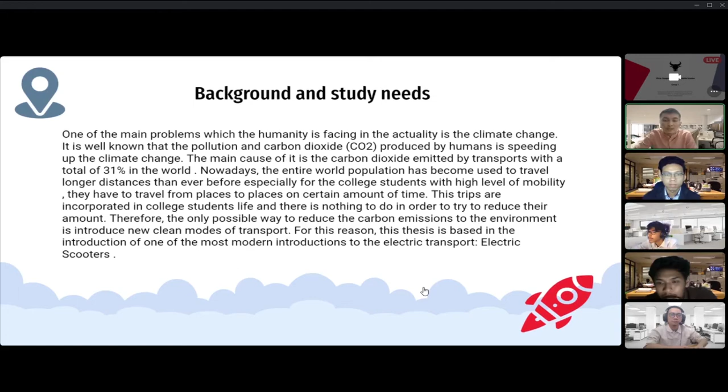In our problem statement, the first one is the electric scooter was chosen in this engineering design project. The initial problem for designing this project is to design a product that is not similar to the current market.

The second one, design a solution to tackle the existing pollution problem with a lithium-ion powered scooter. The third one, existing vehicles have so many problems towards the environment. The fourth one, replacing them with more efficient and durable electric vehicles could be a possible alternative.

The last one, this will be achieved by designing a compact, portable, easy to use scooter. So in our design brief...

We believe that a compact foldable electric scooter which is user-friendly for university students commuting to class within safety standards. The scooter should be lightweight so it can be carried up the stairs when folded. At the same time, it could carry heavy weight within the weight limitation.

The folding mechanism of the scooter should be easy so it can be parked or stored anywhere fairly easily. It has a long-lasting battery so the electric scooter can be used conveniently, lessening the required number of charging sessions, so it can be used for long sessions of commuting.

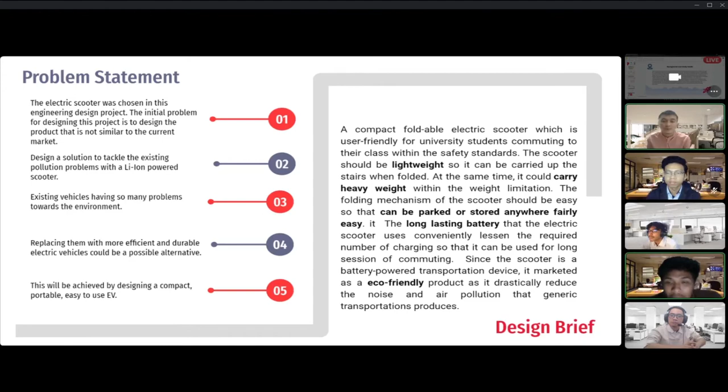Okay, thank you Abifadan for the explanation. Now we're going to proceed to product design specification.

In this part, I'm going to show you the safety procedure of our project, because safety is our number one priority. First of all, we have to wear a safety-approved helmet that fits properly.

A properly fitted helmet should touch all the way around your head. You should wear elbow and knee pads to save yourself from cuts, bumps, and bruises in case of a fall. Also, you have to scoot only in daylight for best visibility and avoid scooting in the rain.

You should also stay on the sidewalk when riding, to avoid wet or broken sidewalks. And you always have to stop at street corners, looking both ways, and walk your scooter across the street. To stop quickly, step off your scooter while still holding the handlebar.

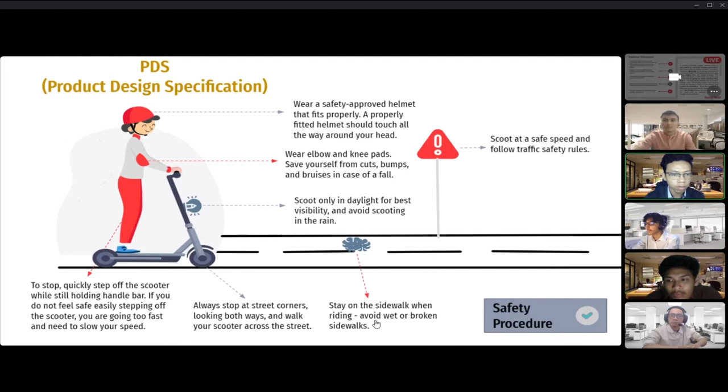If you don't feel safe easily stepping off the scooter, you are going too fast and need to slow your speed.

Now we're going to move on to the materials. The body parts are made of aluminum alloy, plastic, and rubber to provide safety while riding.

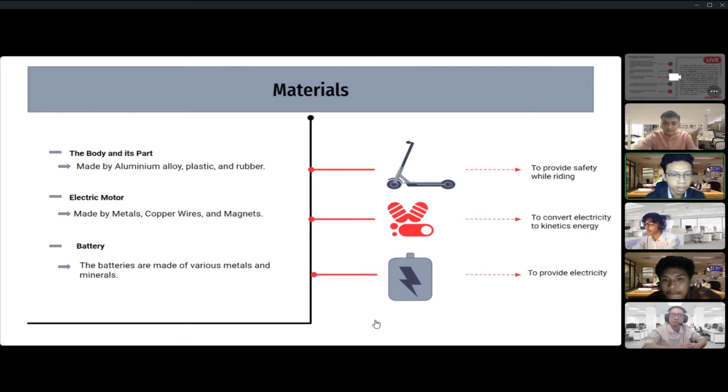The electric motor is made of metal copper wires and magnets to convert electricity to kinetic energy. And last, the battery. The batteries are made of various metals and minerals to provide electricity.

As for the ergonomics, the suspension has good quality to guarantee comfort, adjustable handle that can be folded, soft grip bar, and high quality grip tape for foothold.

For the performance, this ultra-compact electric foldable scooter is famous for thrilling performance, safety features, and affordable price for college students. The result? An incredibly well-rounded, easy to live with, everyday, fast, and durable scooter.

The following are the performance details of the scooter: the horsepower is 450 watts, the maximum speed is 25 km per hour, and the maximum mileage is 15 to 25 km.

For the power, voltage battery is 24 volts and 6.6 amp hours. For charging, it is 100 to 240 volts, 50 to 60 hertz, and the rated power is 250 watts.

For the agility of the scooter, the maximum climbing angle is 15 to 20 degrees, and this device can also be operated using a foot pedal.

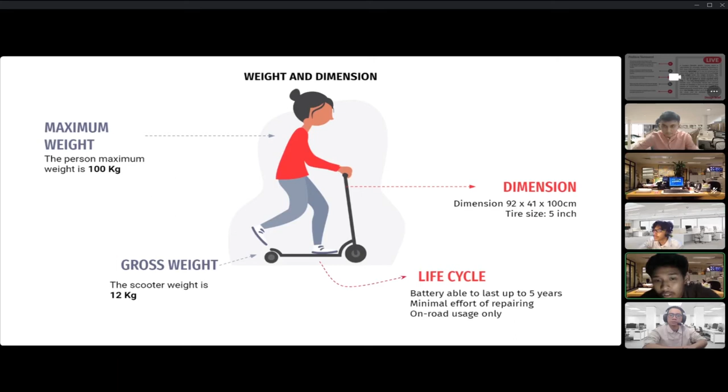Next, of course, the ecology — we support go green.

Next, for aesthetic, we have an underglow scooter LED RGB, and the headlight is LED. For the paint, we only have two models: carbon black and silver dove.

Next, minimal maintenance — the scooter cover is for indoor or outdoor use, UV and water resistant, and also dust proof.

Okay, thank you, Raihan. And now I'm going to explain the design function decomposition analysis. It is divided into three components, and the first one is the electric component.

It includes the speed controller, which controls the speed. The power switch turns on and off the scooter. The motor revolves the wheel, providing acceleration. The swappable battery supplies power to the scooter. And the headlight and brake light provide visibility for the rider and other people.

The second component is the handling component. It includes the hand grip, which gives a better grip for the handlebar. The brake lever activates the braking system. The handlebar controls the direction of the scooter. The wheels move and give traction to the scooter. Lastly, the brake caliper slows down the scooter.

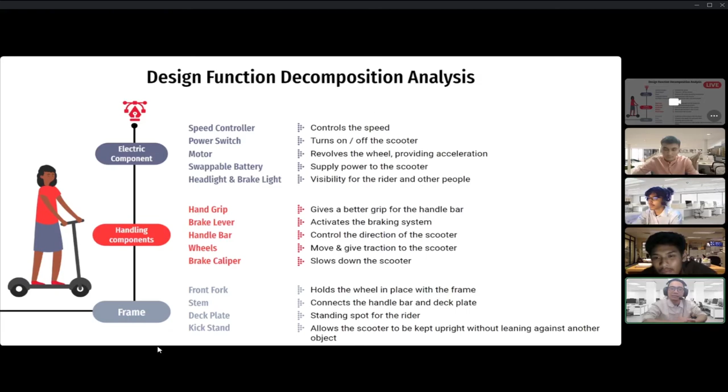Next, morphological function and solution. As shown here, we have 5 solutions and the materials. For the frame material, we have 5 options: carbon fiber, aluminum alloy, stainless steel, and mahogany. For the tire type, we have slick, off-road, solid, all-season tire, and honeycomb. For the battery position, we have 5 options: outside stem, on the foothold, inside stem, in the foothold, and in the handlebar.

For the headlight, we choose LED as the type of lamp, and we have 4 options for positions: near front tire, LED at the handlebar, upper neck LED, and LED on the stem. For the handle grip, we have 5 options: rubber hand grip, leather hand grip, foam, rubber grip with spike, and carbon grip. For foldability, we have 4 options: vertical foldability, simple foldability, complex foldability, and triangle foldability.

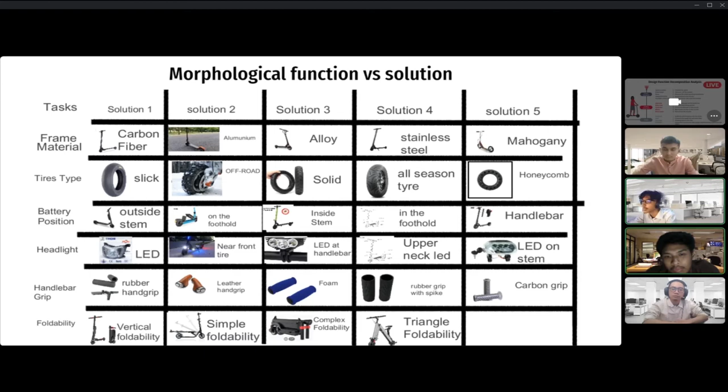Here I will explain about our screening matrix. We have 15 concepts, and we have several criteria as our points for screening our concept. From this screening, we have the best 3 options from our design. Next.

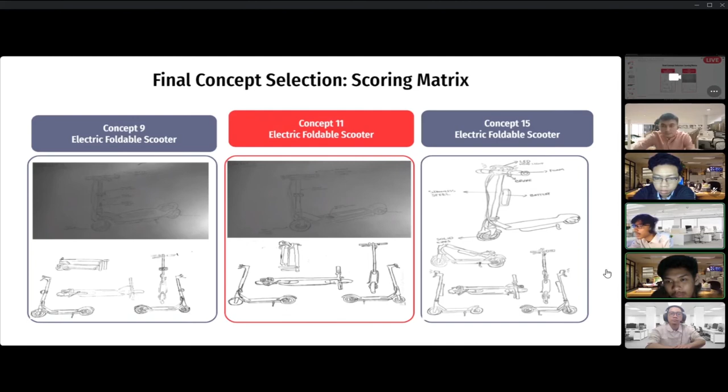As the picture shows below, here are the best 3 of our concepts. From the best 3 of our concepts, we suggest to create a new concept that we consider as the better design than what we have.

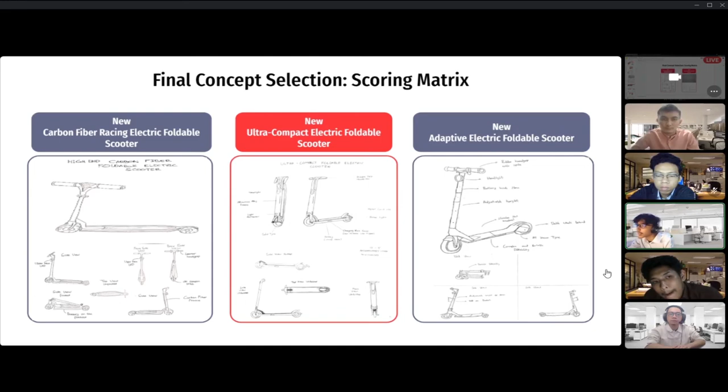And they are: carbon fiber racing electric foldable scooter, ultra compact electric foldable scooter, adaptive electric foldable scooter, multitasking electric foldable scooter, and casual electric foldable scooter.

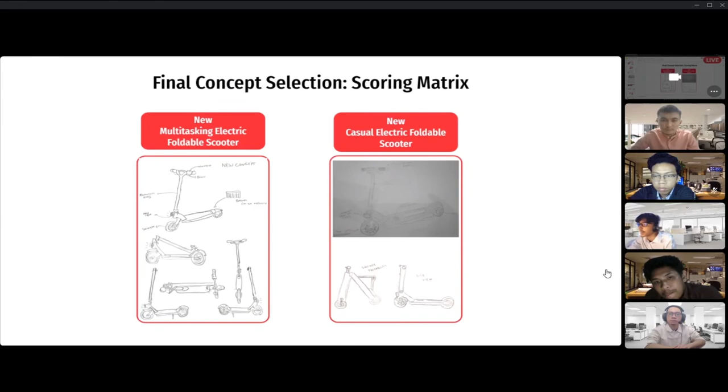Now I'm going to explain our final design and what's new in our design. Here is the in-depth analysis of our final design, which is the ultra compact electric foldable scooter.

It includes a headlight, an aluminum alloy body frame, a reflector at the bottom, and we chose a solid wheel as our tire type. For the handlebar, we opted for a rubber grip handlebar, and we added a speedometer. We also added a manual rear fender, which we can step on in case of emergency braking, and a brake light for safety. Lastly, we added a kickstand so the scooter can stay upright without leaning against another object.

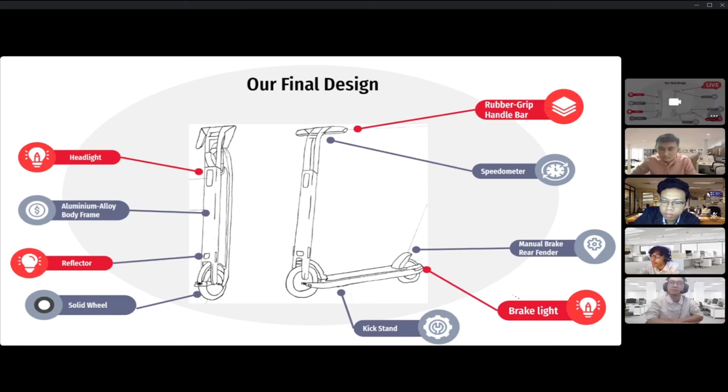So what's new in our final design? As mentioned, we added a speedometer with a built-in ambient sensor that can change the speedometer light at night. For the throttle system, we use a throttle controlled by pressing with the thumb, with two thumb controls: thumb throttle and thumb brake.

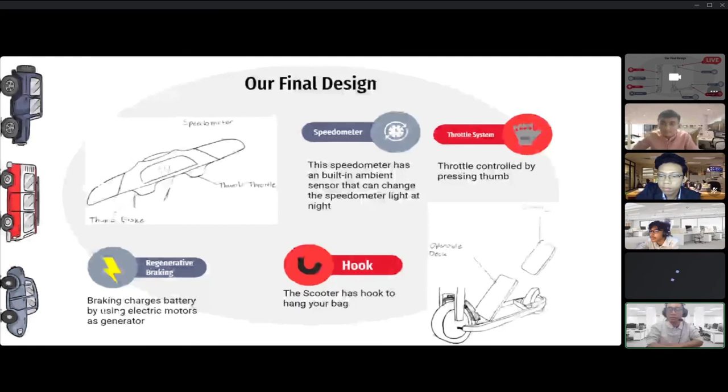We also include an innovative design of regenerative braking, so when braking, it charges the battery by using the electric motor as a generator. Lastly, we added a hook so the scooter can hang our bag.

In conclusion, based on our presentation about the design of the electric foldable scooter, we choose the ultra compact electric foldable scooter as our final design thanks to its advantages. We're positive that many people will choose our product as the next generation electric scooter, as it is able to fulfill humans' needs to gain more productivity and mobility. Our final design meets the criteria of our design brief, which are lightweight, can be parked or stored anywhere easily, long-lasting battery, able to carry heavy weights, and eco-friendly.